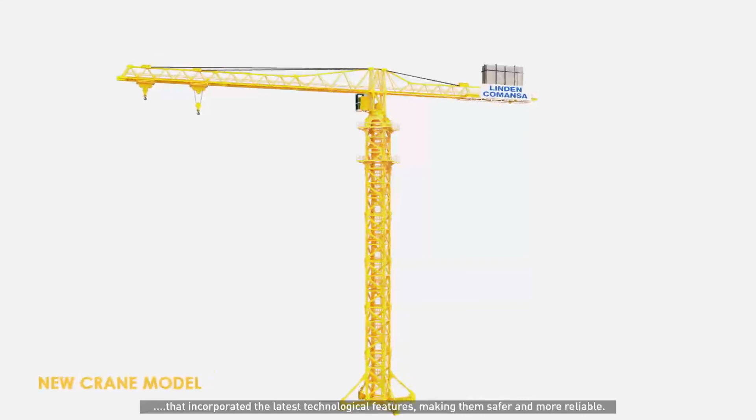One of the largest oil and gas explorers in the Middle East made the decision to replace 17 tower cranes with new ones that incorporated the latest technological features, making them safer and more reliable. The tower cranes were obsolete and corroded. Repair was not possible as spare parts were unavailable.

A consortium of 2 hydrocarbon service majors was chosen for the task. L&T Hydrocarbon Engineering, an integrated EPIC company with a track record of onshore and offshore construction services. And Subsea 7, one of the top 5 players in the global SURF market and a major subsea EPCI player.

A project of such unparalleled scale and complexity demanded a unique set of competencies. Our understanding of clients' requirements, standards and work culture, our ability to match them without adversely impacting operations, and our credo, execution par excellence. Given the complexity of the project, planning took center stage.

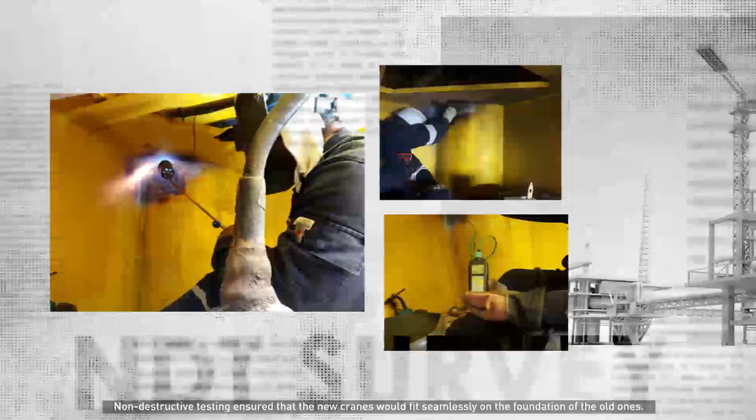Every move was carefully choreographed. Teams were spread over multi-work locations. Every minute requirement on each platform was surveyed. Non-destructive testing ensured that the new cranes would fit seamlessly on the foundation of the old ones.

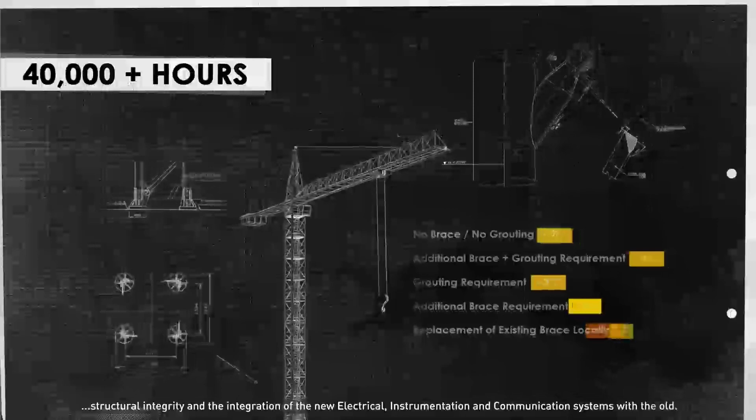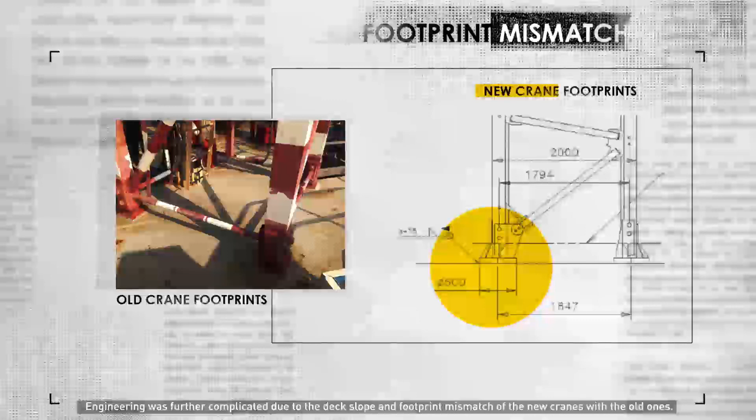Detailed engineering and analysis ensured structural integrity and the integration of the new electrical instrumentation and communication systems with the old. While the old cranes varied in terms of many parameters, the new ones had been standardized. This called for unexpected modifications, structural strengthening, and in extreme cases, even shutdown for deck strengthening. Engineering was further complicated due to the deck slope and footprint mismatch of the new cranes with the old ones.

Linden Comansa and the LTHE engineering team put in enormous efforts to redesign the crane operating cabin to accommodate safety and communication devices within the limited space.

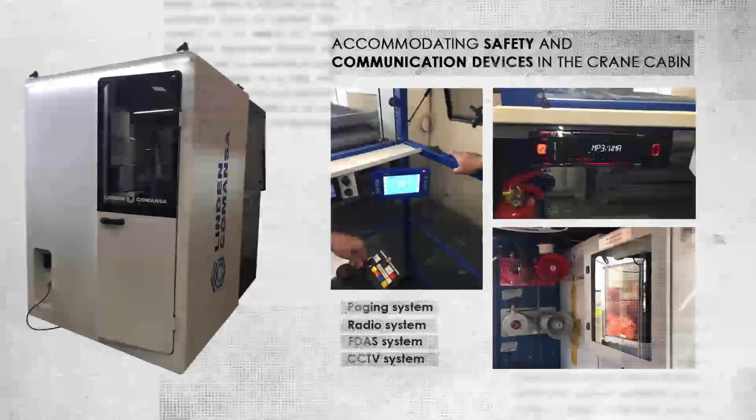The real challenges were offshore. Obstructions and hindrances were everywhere, both subsea and on the platform. Subsea pipelines and cables hampered barge positioning. Suitable jack-up barges with required crane reach and height were available with only a few vendors worldwide.

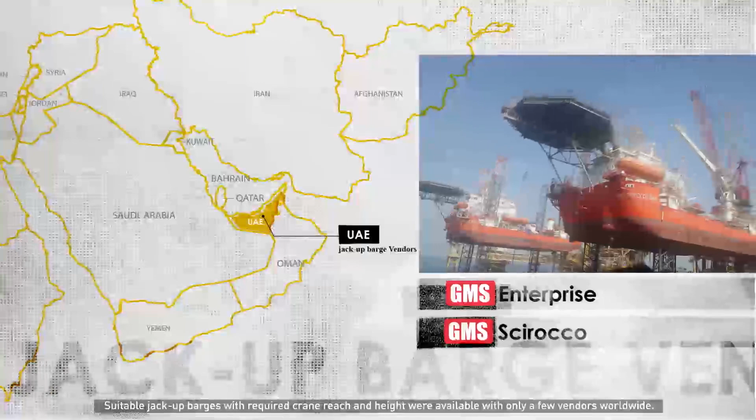Our transportation and installation team handled these crucial problems through intensive planning and interaction with our client's marine team. Material, manpower, services. We aligned all 3 to achieve success.

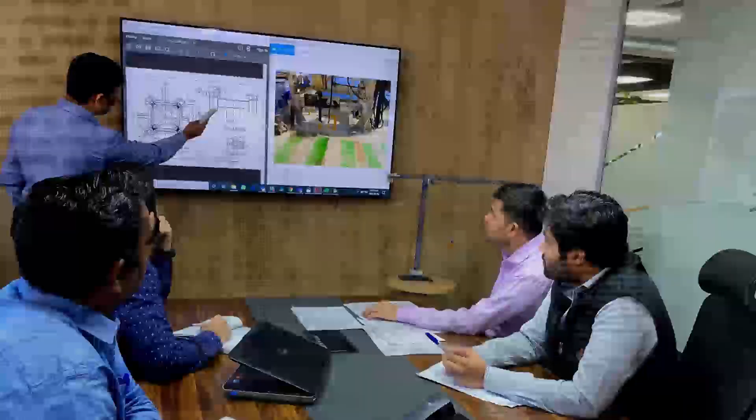The cranes were manufactured in Spain and free-issued by our client. We roped in several crane experts and technicians under the manufacturer's supervision to assist the operation. Close coordination enabled us to manage interfaces with other contractors as well as our client's vessels.

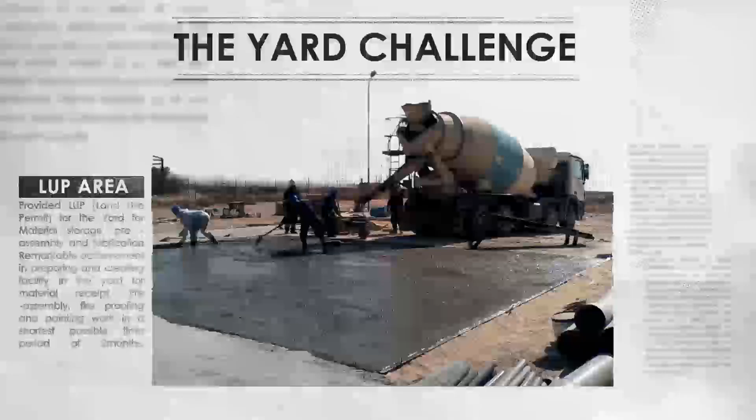Our client allocated an LUP area for setting up of an onshore yard to store and pre-assemble cranes and fabricate structural steel. The cranes were pre-assembled to the extent possible at the yard.

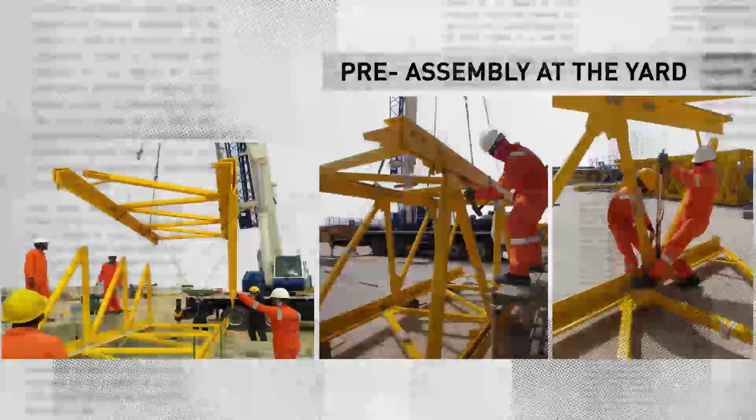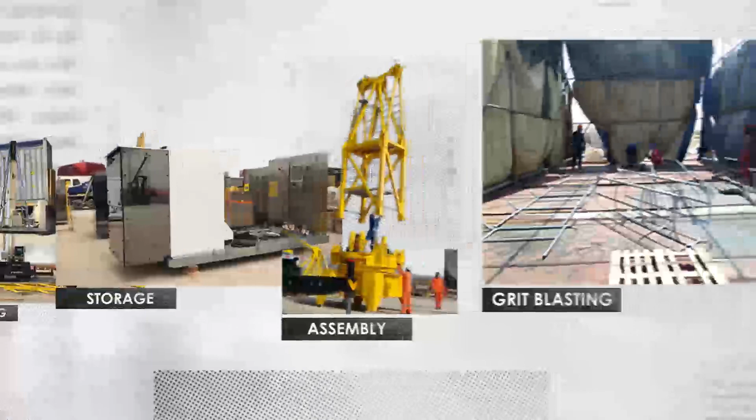Smoothly and seamlessly, we overcame many challenges. Working smartly, we assembled, fireproofed, painted, packed and dispatched the cranes to their offshore locations on schedule, meeting 2 parallel offshore installation campaigns. When time is short, resources must be augmented.

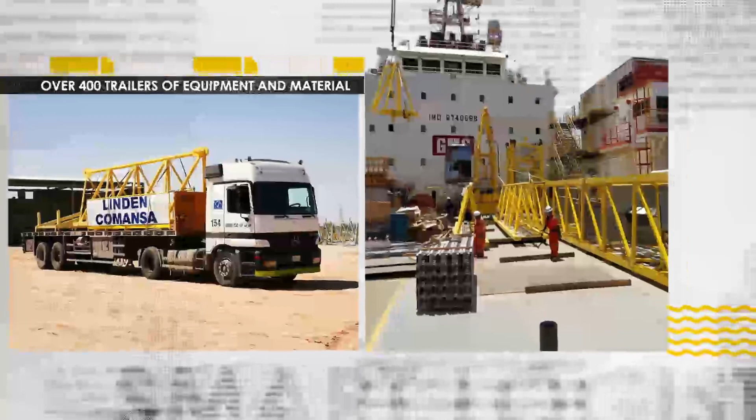We worked round the clock in close coordination with procurement, logistics, offshore teams and local subcontractors. Smart logistics enabled us to transport all material and equipment, as well as essential supplies required to sustain a huge contingent of workers offshore. A large marine force was trained and mobilized to start 2 simultaneous offshore campaigns.

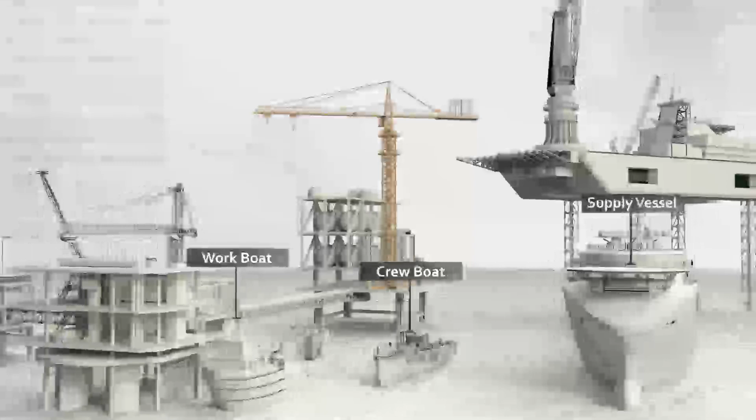Live oil platforms made the stakes even higher. The real challenge was to disassemble and replace the cranes on live platforms in a congested area. The demolition process began with fall protection of surrounding equipment, vessel,

pipelines, etc. The old cranes were rusted and the bolts and pins clogged. Auxiliary instruments had to be removed before the cranes were brought down. Special tools were designed, procured and used.

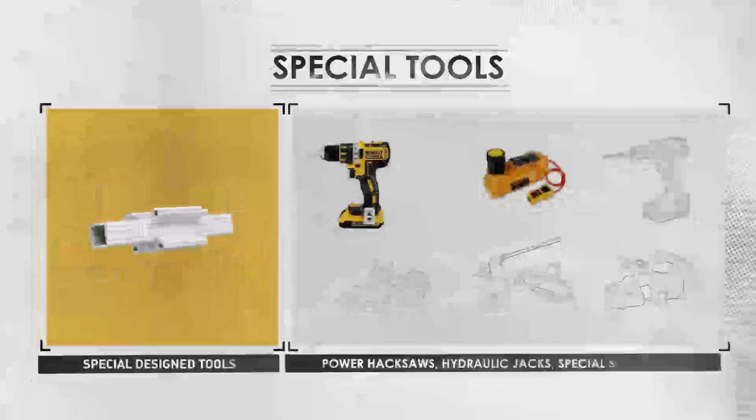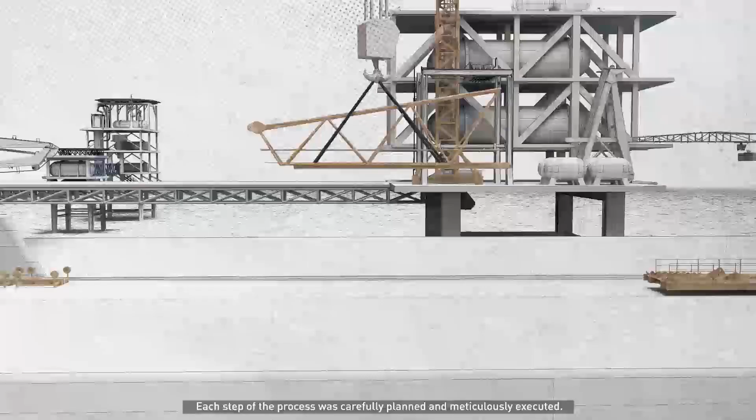Each step of the process was carefully planned and meticulously executed. Safety was a key concern every step of the way.

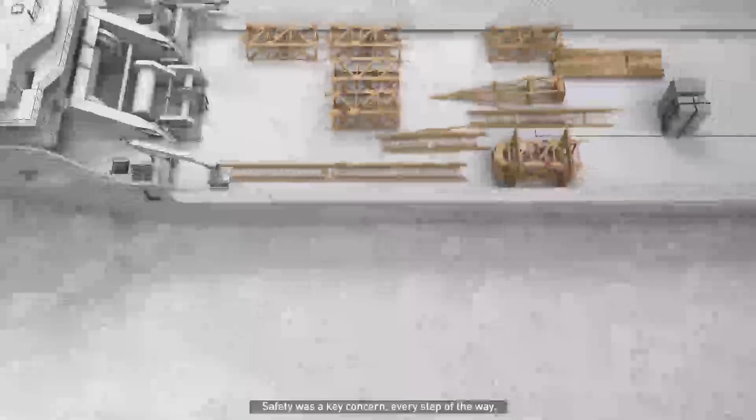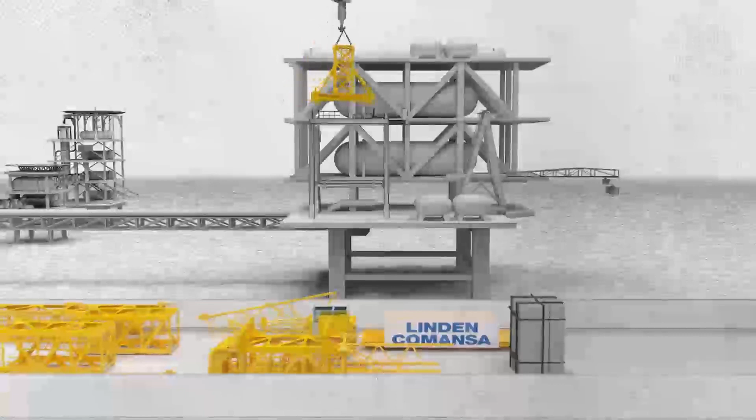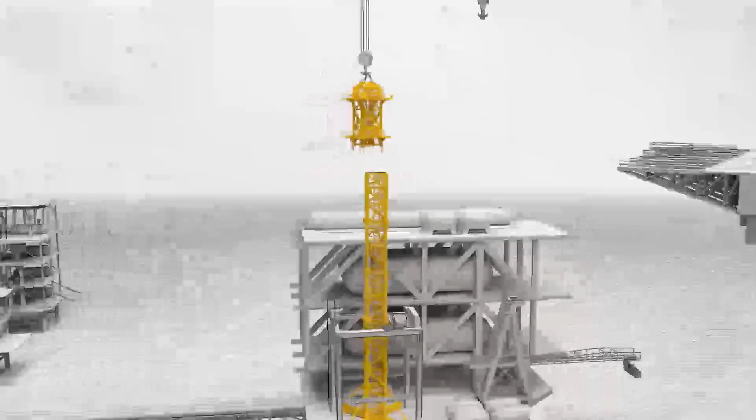The base surface strengthened. Installation begins. Installation nears completion.

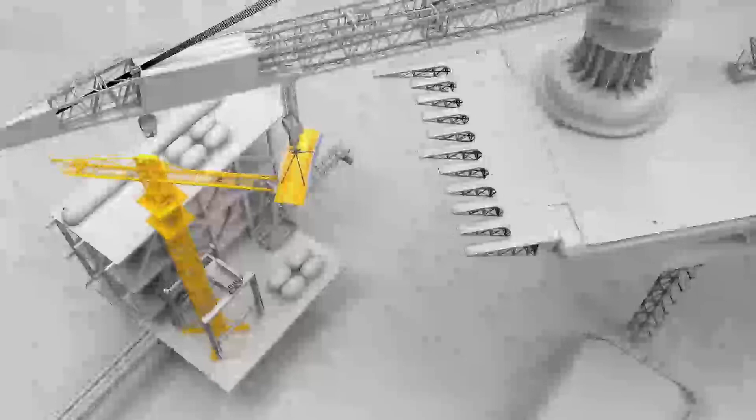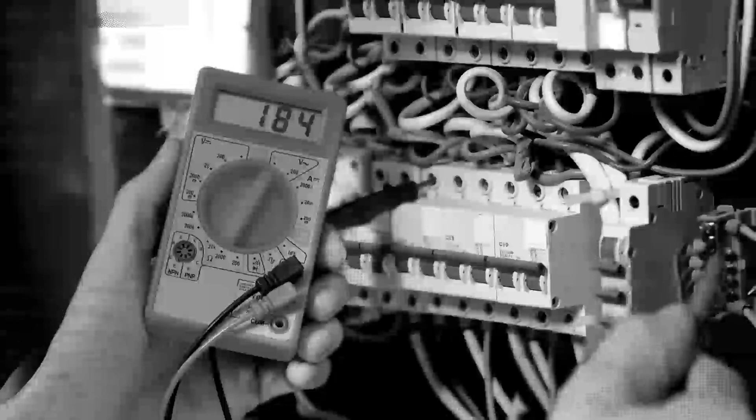Continuity of operations of the platforms were paramount. Circuit breakers on 6 cranes were replaced without shutting down operations. The F&G system was integrated into the DCS without hampering operations.

After installation, the cranes were pre-commissioned and load tested to affirm the readiness of the cranes for handover to operations. The learning curve was steep but rewarding, and every movement the team shared and implemented the lessons learned. Highly synchronized, energetic and goal-driven, the team achieved impeccable overall productivity.

The first crane took 35 days, but we slashed down the time to 10 days. And finally, all the cranes were commissioned and handed over to the client for operation. Overcoming the many challenges of the project, we completed it ahead of schedule with an enviable safety record.

Regular client interaction and involvement helped streamline the project's processes. The integrated project management team concept enabled both Subsea 7 and L&T Hydrocarbon Engineering to complement their strengths for the success of the project. In appreciation of our performance, our client accorded the project the rare honor of Great Achievement,

Successful Story. Flushed with success, our teams move on to the next challenge. With our credo of execution par excellence, we pledge to keep oil flowing, economies growing.